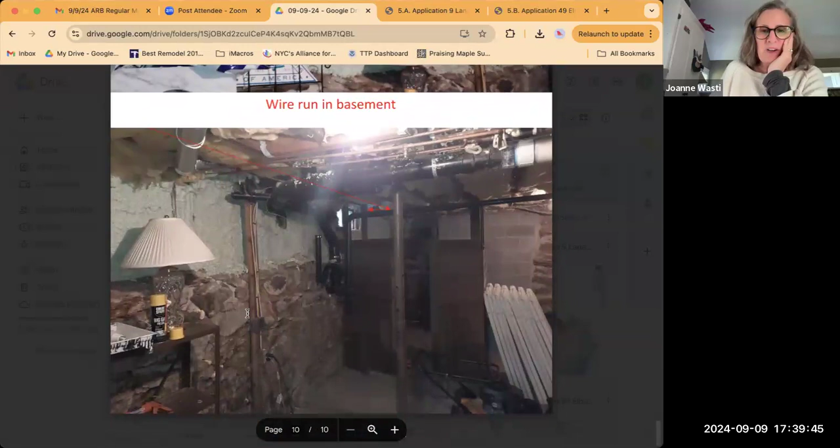So here's inside. Wow, this is really comprehensive. I don't know, are we used to this? All these photographs explaining it. Oh, it's great.

Thank you. Yeah, absolutely. This is kind of our standard - we send these guys out so that in project management we know exactly what we're delivering to the customer and what is and isn't possible.

So I was just gonna go back to the first photos of basically what we see either from the road or from the parking lot. So there's the building - is that the back of the building? Yes. Okay, so that's where the solar panels would go. Yes, correct, it's R2 and R1.

And I assume this is the front. Yeah, that faces towards the customer's house.

So Jill and Victor, let me know, do you need to see anything else? No, I think it looks great, sounds great. I make a motion to approve. I will second. All those in favor? Aye, aye, yes.

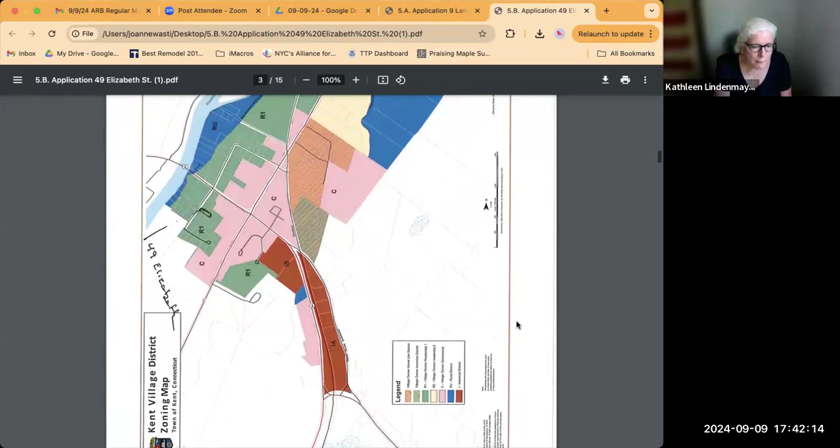As we said, we were going to build 2 rooms onto the back of the house that we've moved into now, which is 49 Elizabeth Street. There was an addition on the back of the house, which is a bathroom, which we are taking off, an older bathroom.

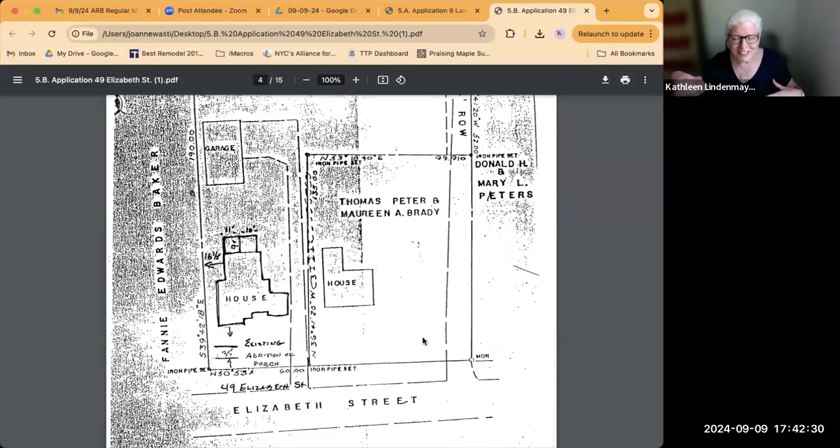If anybody wants one of those old bathtubs, like the old ones from like 100 years ago, cast iron tub - I've got a cast iron tub that is up for grabs. So we're going to take off that bathroom and replace it with a kitchen and a bedroom in the back. That's it.

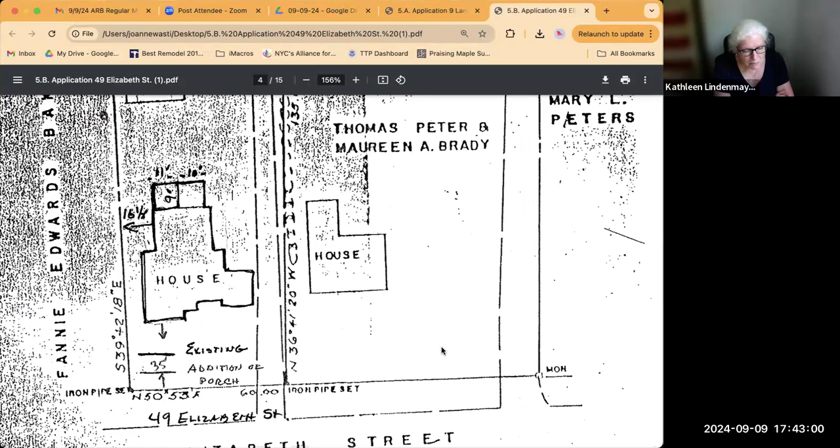And it will be, I guess, conforming to whatever the site plan is. I know that part of the house, because it was built around 1930 - there may be pieces of it on another side that are non-conforming, but you should not see much more of this at all. And it's actually onto the conforming side of the property, the little bit of extension out that we're doing.

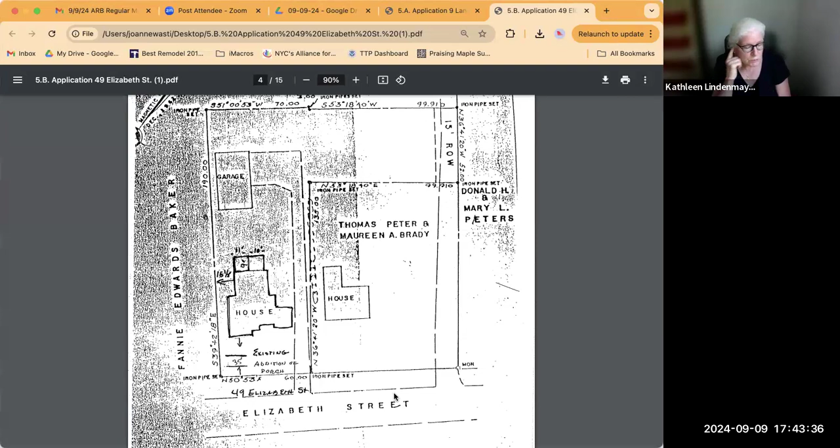The other thing that we were going to do is on the front, to build just a small, very small porch, which as you can see by the pictures, you can hardly see where that is. So really all it is going to be is probably a little bluestone pad in the front where we can put a couple of chairs and watch the kids go to school in the morning.

I don't know if you can pull up those pictures, but can you see the pictures that I have up? I can't see them. We can see them, yeah. Kathleen, look at the top of your screen, it'll say meeting and then it'll say Joanne's screen. Oh, you click on that. Got it, got it. Sorry, okay, sorry, all right.

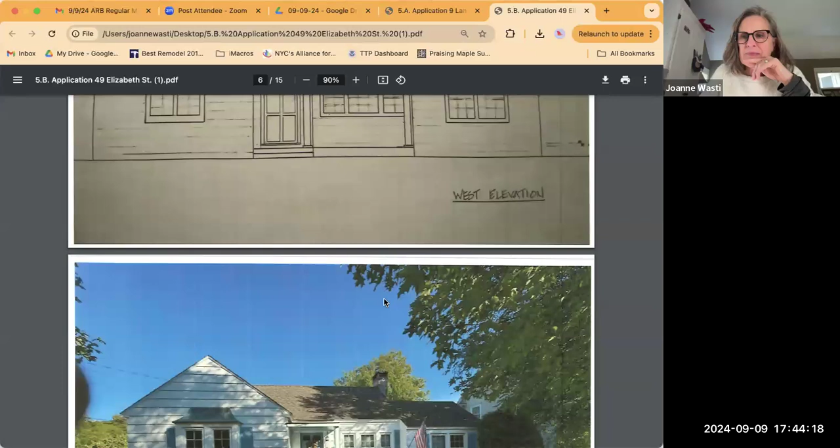So as you can see from the west elevation there, I mean, it really changes nothing about the house.

Those, you can see the front door and the 2 columns next to it. That's it—the only thing really being added are the 2 columns to hold up a slightly extended porch. There's already a little porch over the front of it, and we're just extending it out to hold up that second column. You can almost see it—it looks almost the same. So you're really not changing the overall look.

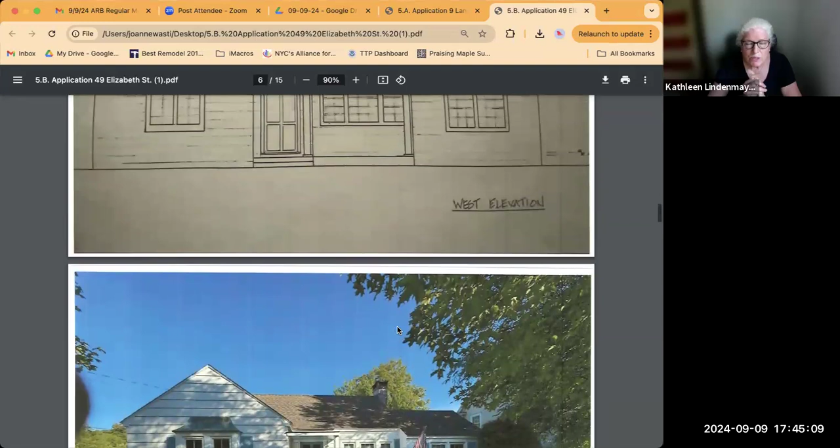So you're going to extend the porch out basically in front of those windows. Yep, that's exactly right. That makes sense. And then you're adding the window above, and we liked the idea of adding a little dormer to bring in light.

Because we are going to put that little roof over the front, we wanted to put a little dormer that would mirror as much as we can that little window on the lower left—make a tiny miniature version of it and put it up to bring a little bit of light into the living room there.

Very nice. It's a really cute little cottage. It is, yeah, tiny really though. Which is why we were, yeah.

The only thing we're going to put in the back is basically right there where that is. We're going to put a... I think the plan should be here too, right, so you can at least see the footprint.

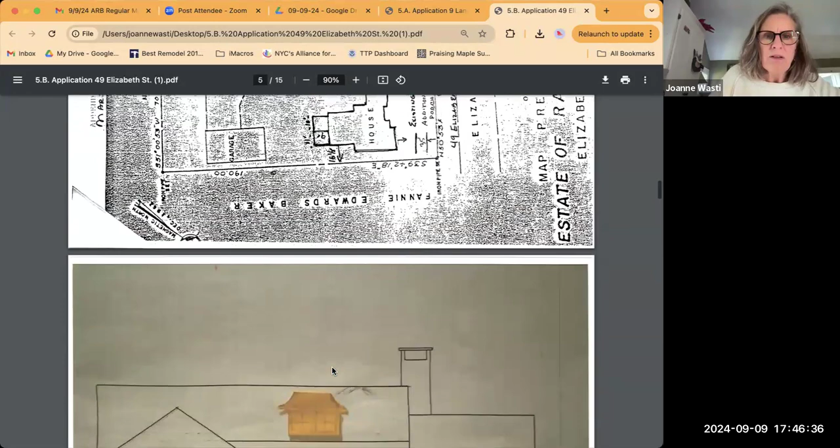The one I saw—this. I think the plans are in a separate file. They're in your Google Drive, the next file. Oh, they are in another file. Okay, hold on, so you can at least see the footprint.

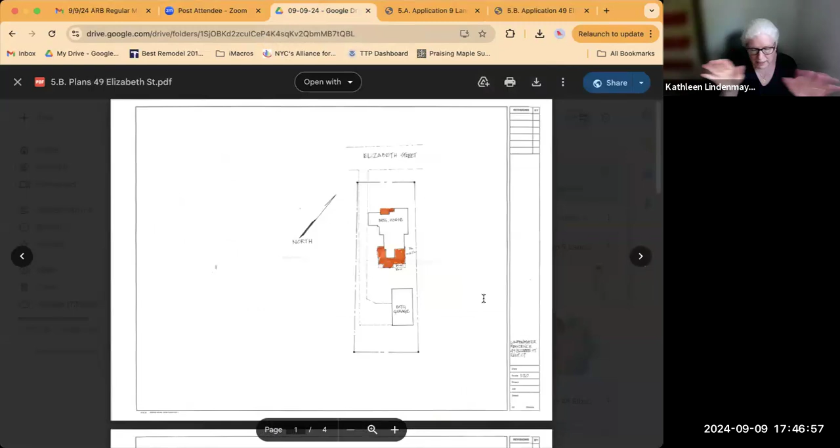So basically it's a small to medium sized kitchen and a bedroom right next to it. Here we go, yeah, there you go.

No, it's more than that—there's elevations and everything. Yeah, there are just a few more pages down. There we go.

I was just trying to understand—when you say you're taking it off, are you going to use the existing footprint for the new kitchen, or is there actually a change to the footprint or the roof line? There is a slight change to the footprint.

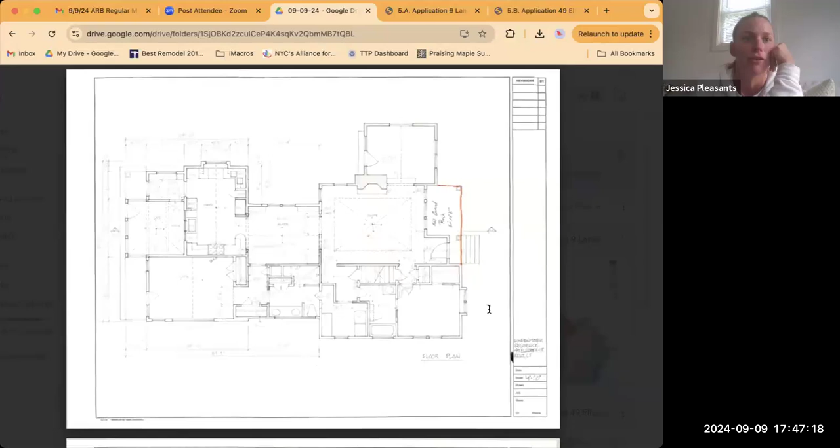Oh, here are the elevations. These are all proposed, but is there an existing plan that shows what's changing, or is that just the proposed plan? If you stay right there, you see, in the middle of the top one with that kind of rectangle window right there.

So if you see a little bit, the addition that was to the right of that is what's coming down. You can see part of the roof line to the upper right—that's part of it, a little bit higher up.

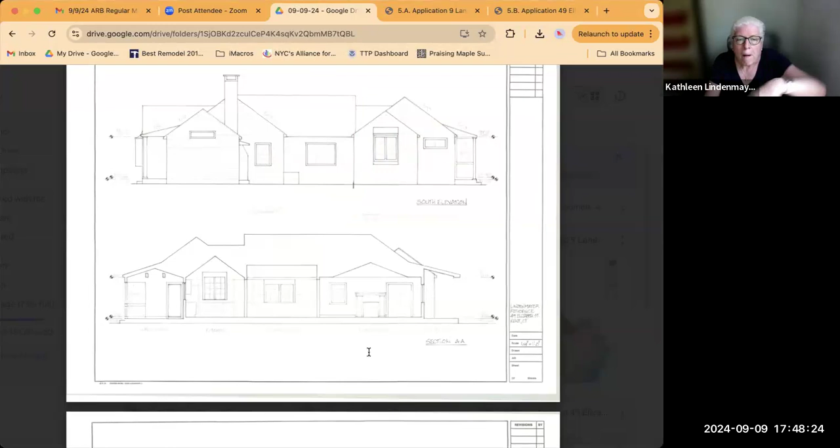You can see kind of the existing roof line for what's currently there, a little bit higher up—it's the horizontal line that goes down from the top roof line. So yes, there will be a slight increase. That's going to be new, but you can see that horizontal line it's going to attach into is part of the existing roof line.

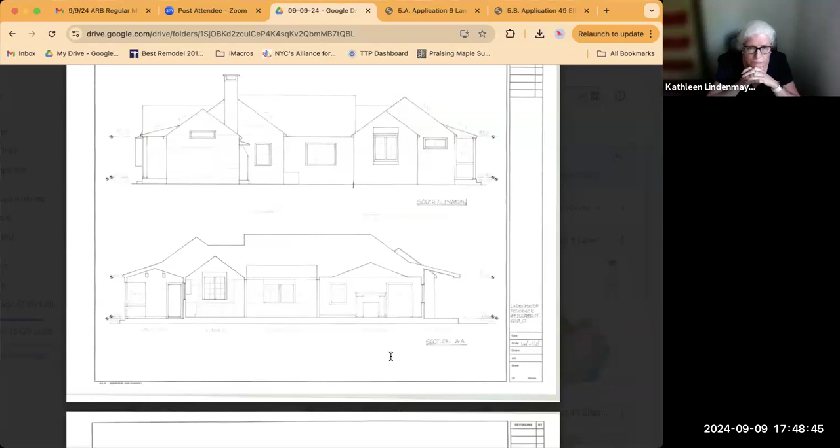That's great, it'll clean that up quite a bit in the back. But from the front, that's basically what you're still going to see.

So the dormer is not included on these drawings—the dormer on the front that you'd like to add. That is correct. I guess he didn't put it on there, but that's why we supplemented on the other one that we'd like—that's going to be the very last thing we do.

I've got a priority to try to hopefully build this before the midwinter sets in.

As a new member, I read through all the rules and regulations given to me, and there are specifications for dormers. I don't know how closely the law of the land is adhered to, but the drawing doesn't convey it clearly. I think Kevin just put the dormer on the drawing, cut and paste, but the size isn't indicated, nor how far from the ridge of the existing roof it's going to be.

It's hard for me to understand what that's actually going to look like. I think your application says it will be a shed roof, but the drawing doesn't really show it as a shed roof. It shows it mimicking the really cute window on the existing facade. I like the idea, I think it will look great, it's just ambiguous right now what exactly is being proposed from my point of view.

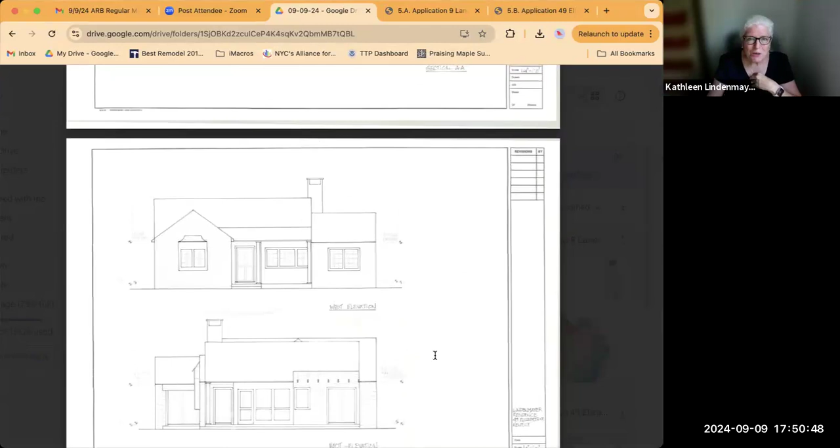I understand it's ambiguous. We just know what we wanted the look to be - we want it small. Obviously it's got to be relative to the size of the house, which is why we showed it as it is. Fabricating it is something we still have to work out. We'd like it to be a similar material on the roof, maybe a little copper, but we haven't gotten that far in how we're actually going to do it. We just know what we wanted the actual look to be.

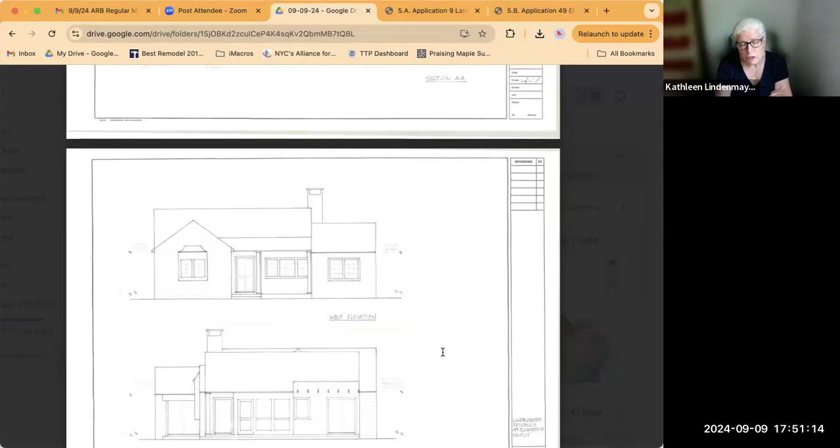So maybe that part you could come back with when you have something more specific, and we can look at the other stuff. I do feel the scale of it seems a little off on what we saw, with it kind of plunked on there. It would be good to see it in the proper scale in the drawing. That's fine.

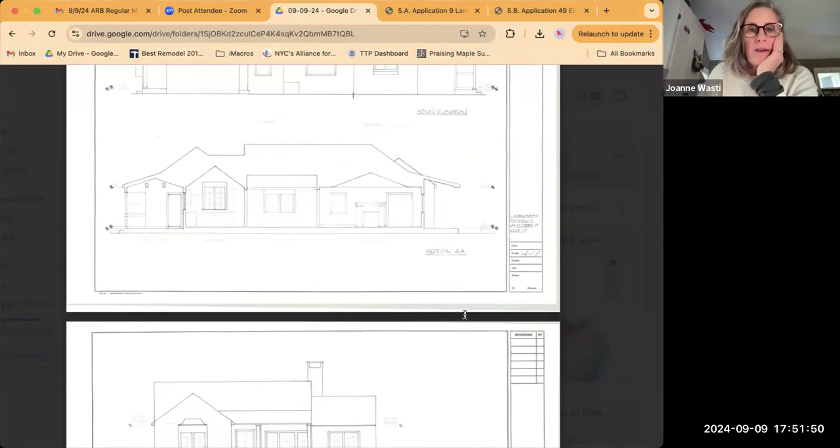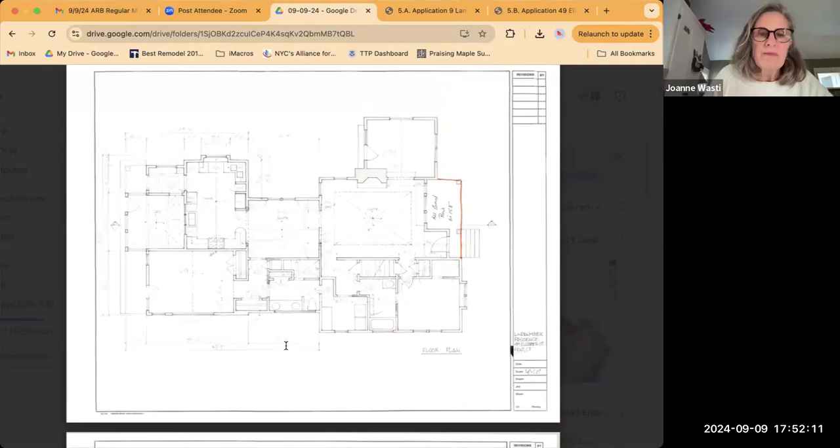Anything else, any other parts of this people want to look at or talk about? So here's the plan. On this floor plan, what part is existing here?

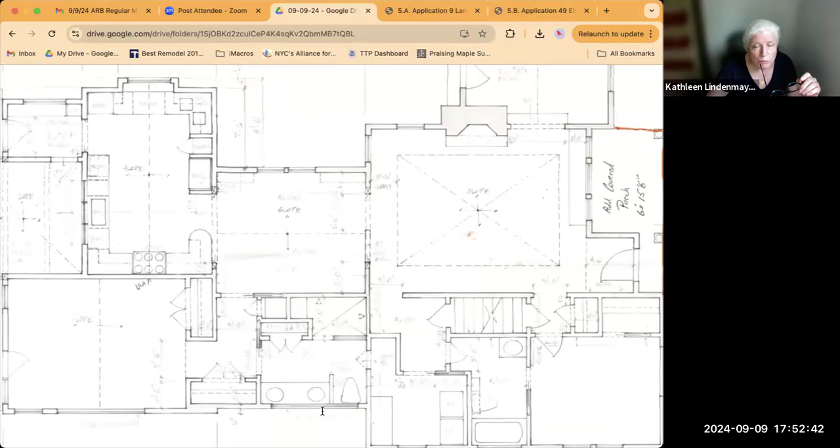The front of the house is all the way to the right. I'm just talking about in the back - that middle room right there is existing, that's currently a bedroom, and the bathroom goes off of that. The bathroom basically takes over most of what's in the kitchen, from the depth out in the kitchen. That's what's coming off.

And then on the bottom left here - that's currently a porch right now, an outdoor space. It's a porch, and we wanted to make that a bedroom.

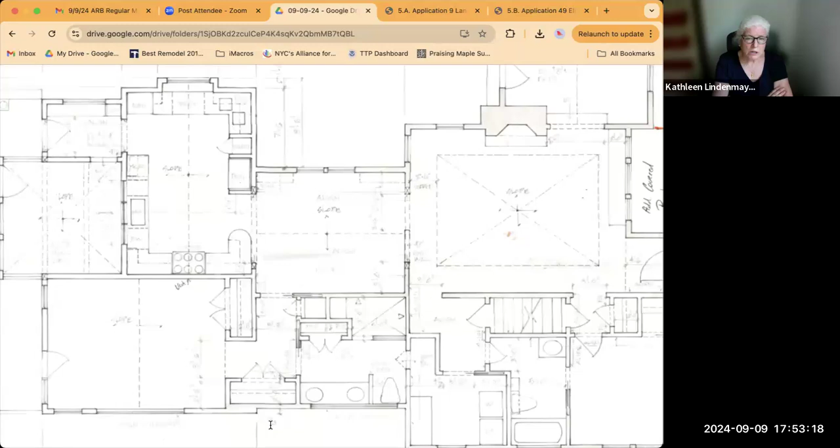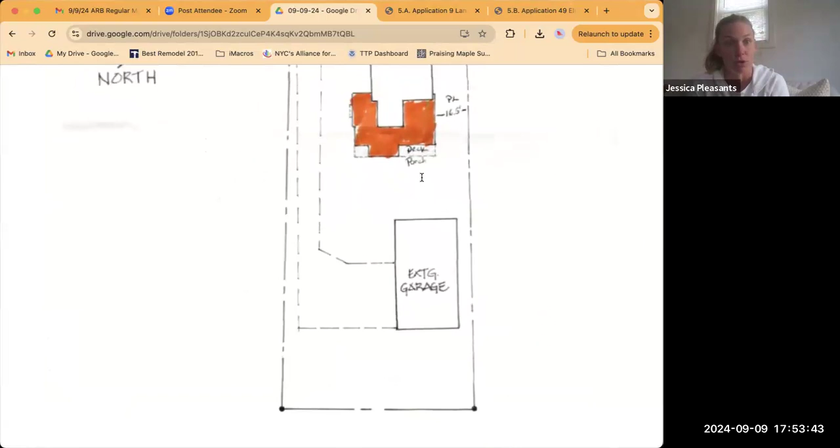So I guess we can make a motion to approve as submitted, or should we suggest this is revisited at the next meeting with revised elevations to show the dormer? If it's going to hold this up, can I just take that dormer off? I'd really rather, if possible, unless there are other major things, not delay this again.

We can approve without the dormer, right? And if you want to add that at the next meeting, you can come back and just do the dormer part of it, not the whole application again. I'll put in the letter that it was recommended you return for the dormer with more details, specifically regarding size and materials. Does that work? That works for me.

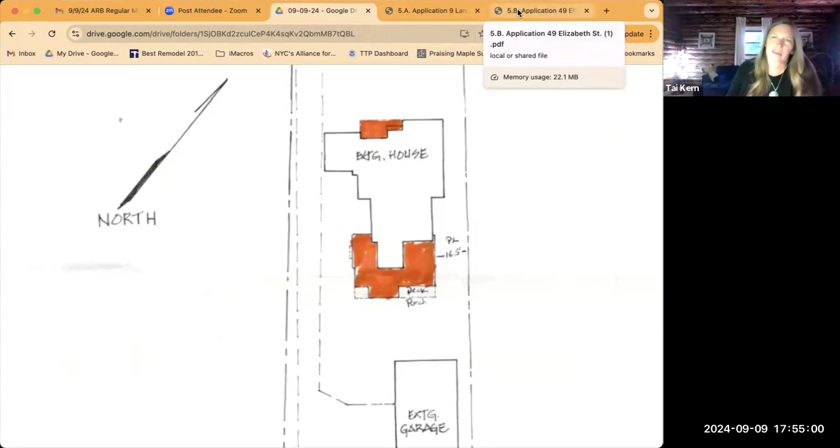Motion to approve based on the drawings submitted. Do we have to rephrase that motion to approve except for the dormer, with the drawings submitted? Because the dormer is on that first - well, they're not on the elevations, the architectural drawings, I guess that's what you'd call them.

All right, so I will second that. All those in favor? Aye. Aye. Okay, so it looks like it's approved, except for that little dormer piece - if you could just come back with more specifics.

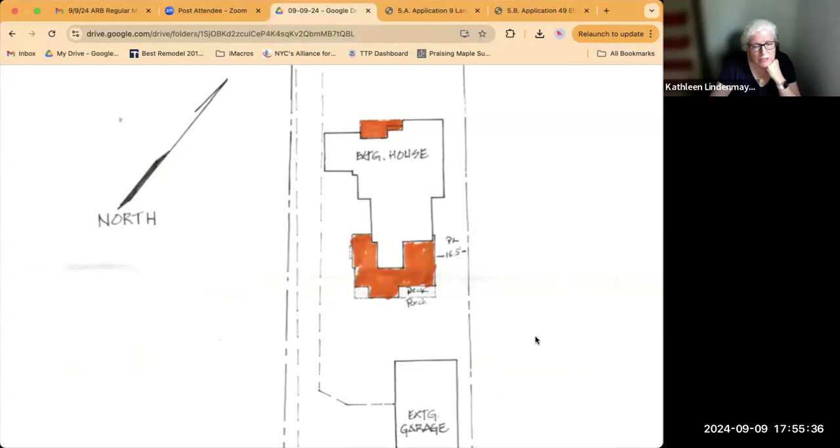Especially since it's the front of the house, I think it's important that we know a little more about it. Okay, we can do that. I'm eager to get my builder and others to get me more information on it too, so this will be good. I'll ask my brother for more information.